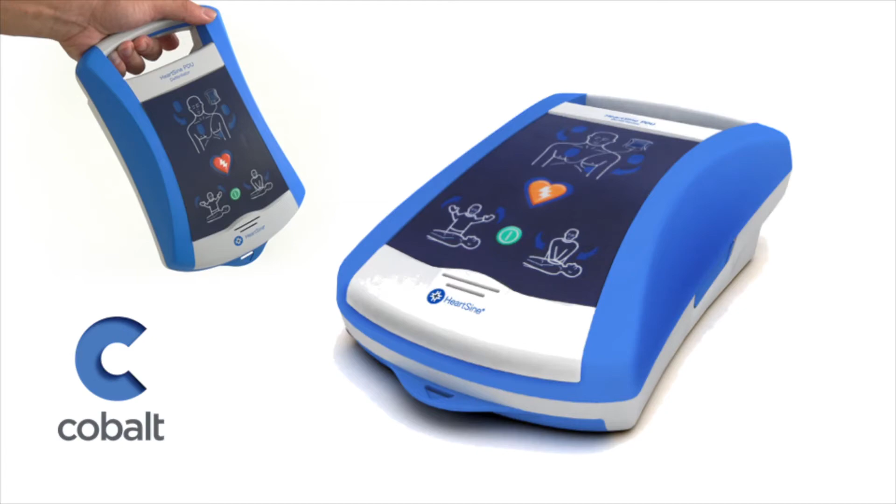From our Melbourne base, we work with organisations from across the globe, developing products that match their vision and technology, from new startups trying to make their place in the market to large established household names. We work in a number of industries, including consumer, sports and leisure, science and medical, transport, industrial, and electronics and IT.

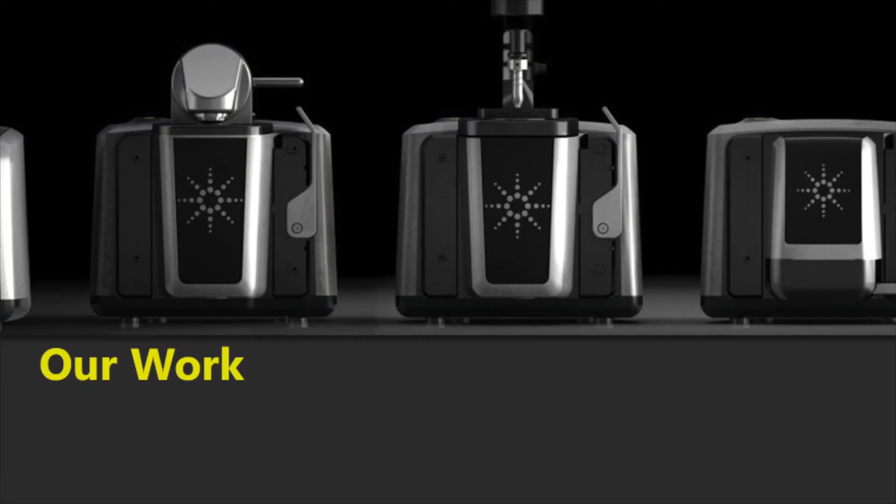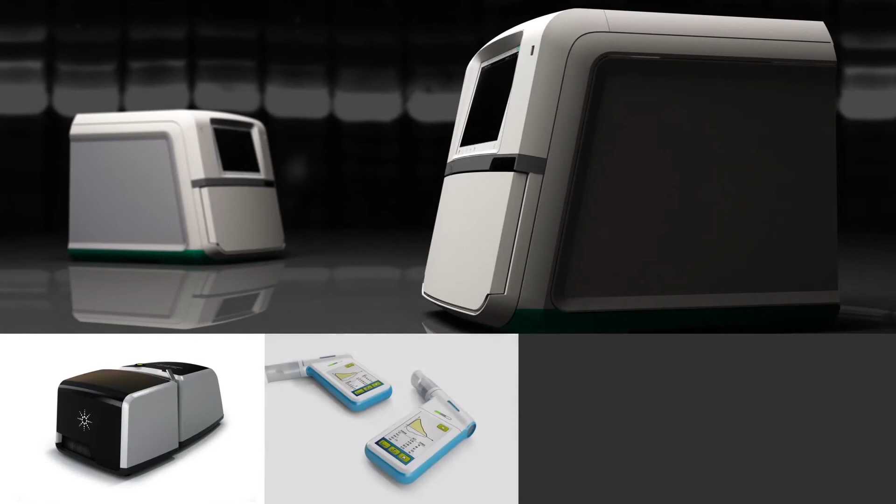I'd like to give you a bit of a snapshot of some of our work, just to give you an idea of the variety and breadth of projects we're typically involved with. From consumer products to automotive, specialised industrial to DIY, industrial design to complex engineering, from specialised scientific medical devices to your everyday keep cup. This gives you a bit of a flavour of some of the variety of projects we handle at Cobalt.

Now I'm going to give you an insight into one of our recent projects that was brought to life using Creo: the Maton case.

Maton Guitars, from its humble beginnings in suburban Melbourne in 1946, is now one of Australia's premier guitar brands. Located pretty close to here in Box Hill, for over 70 years successive generations of the world's biggest names in music have owned, played and created amazing music using Matons, from the Beatles to the Wiggles, from Paul Kelly to Keith Urban and Tommy Emmanuel, to name a few.

Throughout, Maton have built their guitars with love and passion and felt their customers' pain when their guitars arrived damaged on tour. So in 2015, Maton decided their cases should be as good as the guitars that went into them, and after a thorough review, they engaged Cobalt to help with that process.

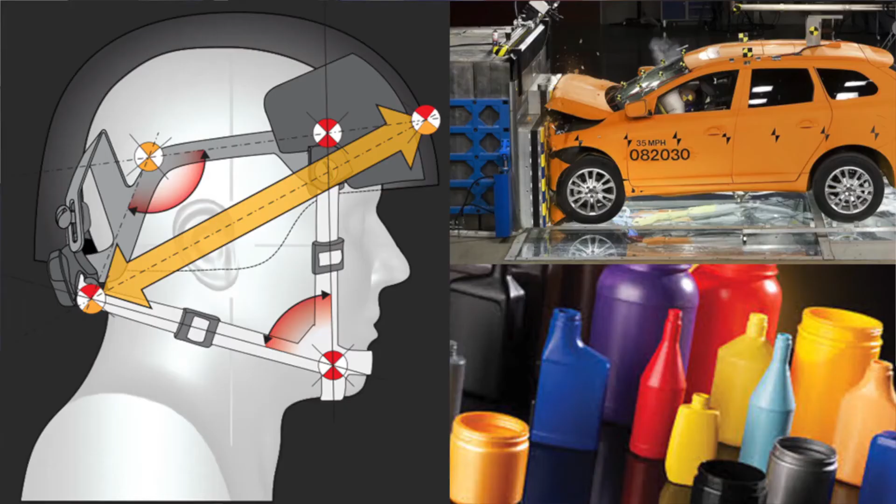So where did we start? We looked at helmets and how they have a very snug fit. We looked at airbags and rigid cells and how they absorb energy yet protect. We looked at blow moulded bottles, how they form a robust yet lightweight outer shell.

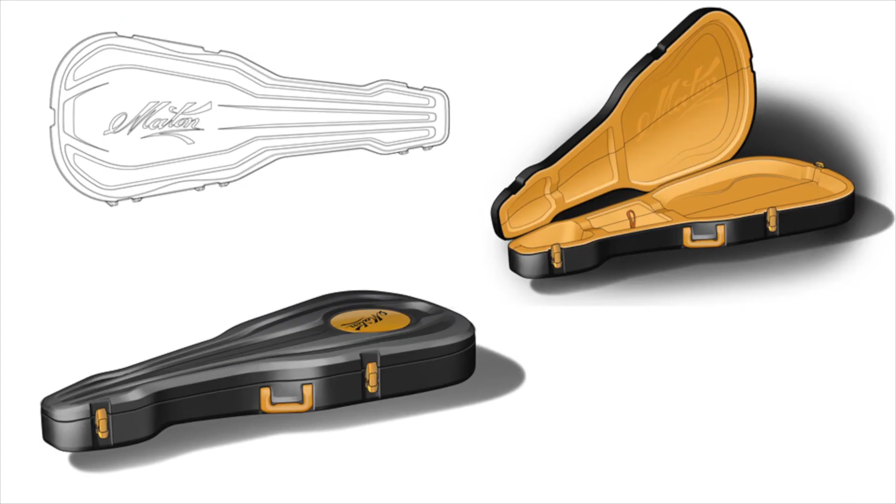The upfront engineering design focused primarily on the function of the product, whilst integrating a considered design for manufacture approach. Integrating this into the product aesthetic and style is a critical step and something we take great care with at Cobalt. We knew that musicians using the product and Maton cared very much about how things should look, and so do our designers.

After exploring numerous options, a concept design was settled upon, and these are some of the final concept sketch renderings that were agreed on. This is when Creo takes over.

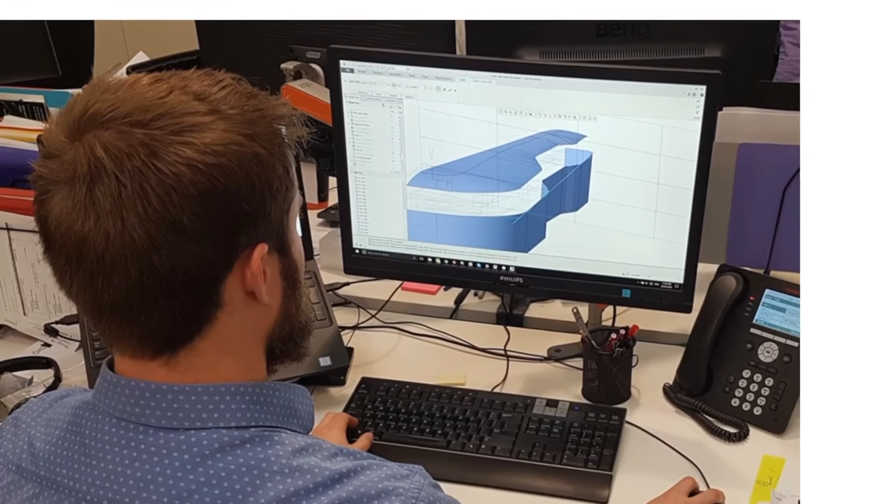Our engineers take the design intent from our industrial designers and turn it into reality. The first and most critical step in this process is to create a master surface model, and we relied heavily on the advanced surfacing features within Creo, including the ISDX extension, to develop and refine this model, ensuring the original design intent from the designers was maintained.

This is a heavily iterative process, and the ability to create complex, high-quality surfaces from within Creo provided huge efficiency benefits to the project. This is compared to using an external surfacing package such as Alias, importing the surfaces into Creo, which makes iteration of those surfaces quite difficult and time-consuming.

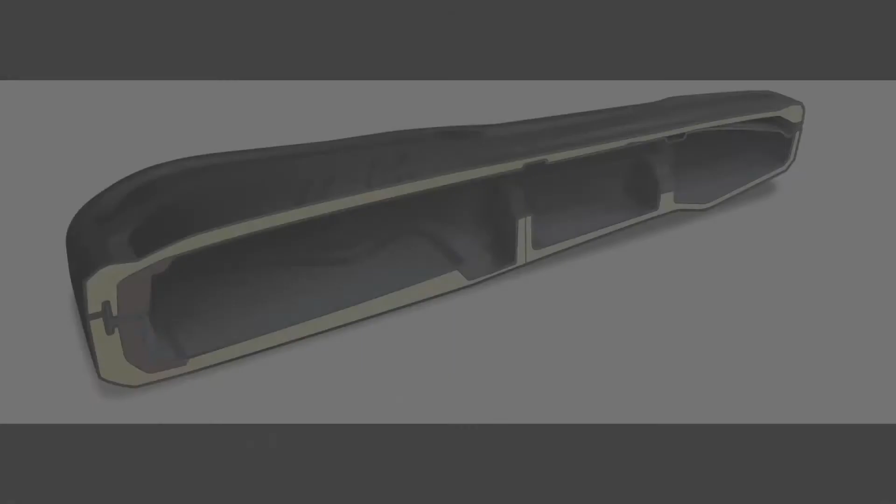Other guitar cases are generically shaped to suit a large number of guitar models and brands, which creates a sloppy or loose fit. In contrast, the Maton case has an engineered, tailored fit specific to each Maton model.

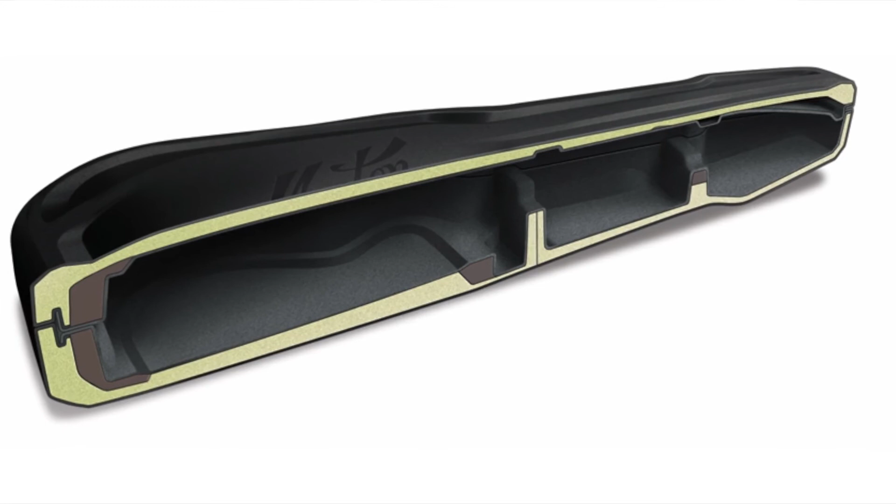We created a design that utilises a common external shell, but integrated unique moulded internal cushioning components. The reality of this is a large number of individual models, all referencing a common master model. Creo's ability to handle large component assemblies, using simplified reps, made this CAD process quite simple.

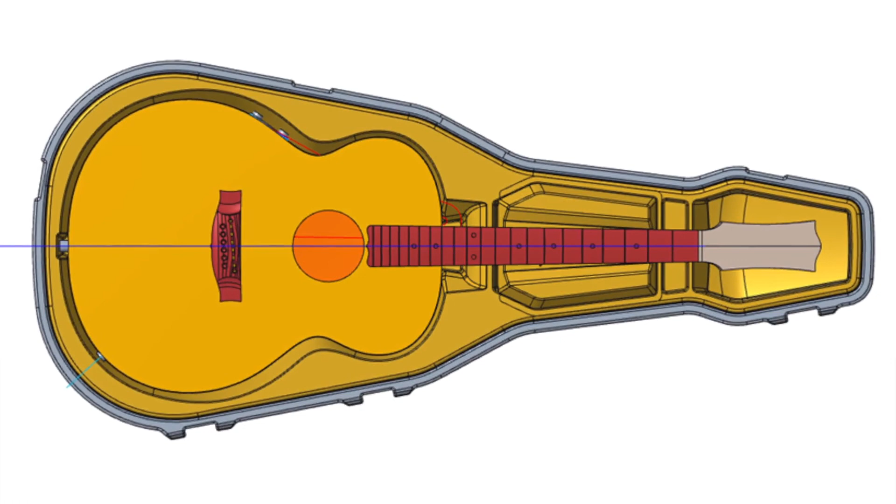Creo's ability, with the reroute feature, provided real benefits when generating all those unique internal inserts. We were able to model one complete set of parts, then duplicate and rename those models and re-reference to the correct surfaces in the master model, which meant all the unique internal inserts were created quite simply without having to repeat lots of work.

So the result is the revolution of a traditional product that provides real benefits to our client, Maton, and the end user, the travelling user whose precious guitar is safe and well protected. This case is now in production and is being shipped with brand new Maton guitars.

It's a product we're proud of and one that we feel really demonstrates our unique approach when designing new products. So we've brought a sample with us today - it's over the back on our table, so if you'd like to have a look later, please come and see us, or if you have any questions, please come and talk with us. Thanks a lot.